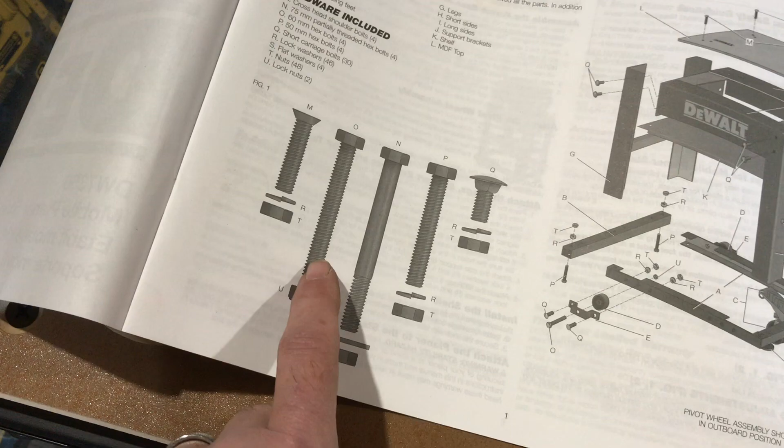Also, just one little note. Let's go through this. It's going to tell you to use these to put these casters on. Don't listen to that. Oh, I said the dirty word. Use these instead. These are spare. The bags came with both of them. Now the casters are listed both on the instructions and on the bag. All the bags actually have labels on them as well. Use these. These are not listed as that.

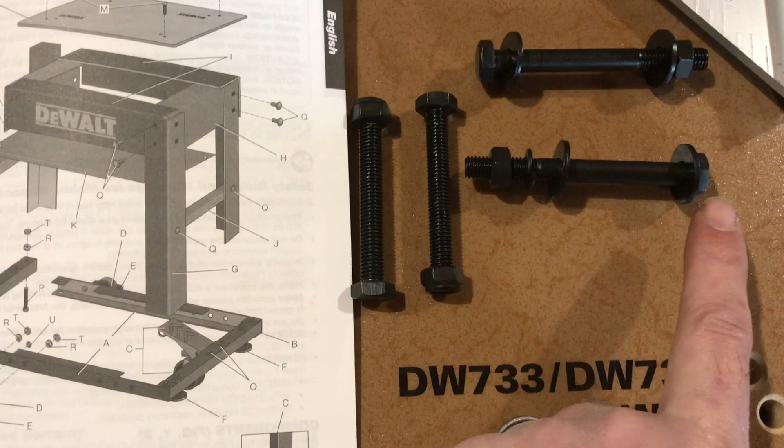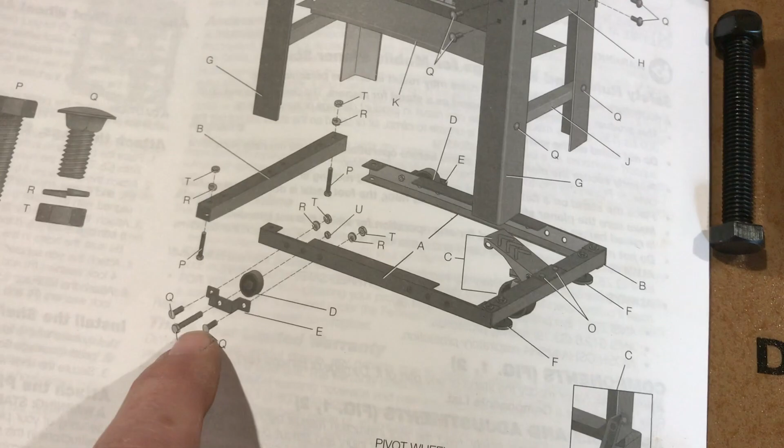So use this bolt with the non-threaded shank and the washers for the rear casters. Also, on the front caster, it shows to put the head of the bolt here, and then put the nut and the lock washer on the other side. Don't do that, because if you do, your leveling feet, you've got to crank them almost all the way out to do that. So my advice is to put the bolts facing up.

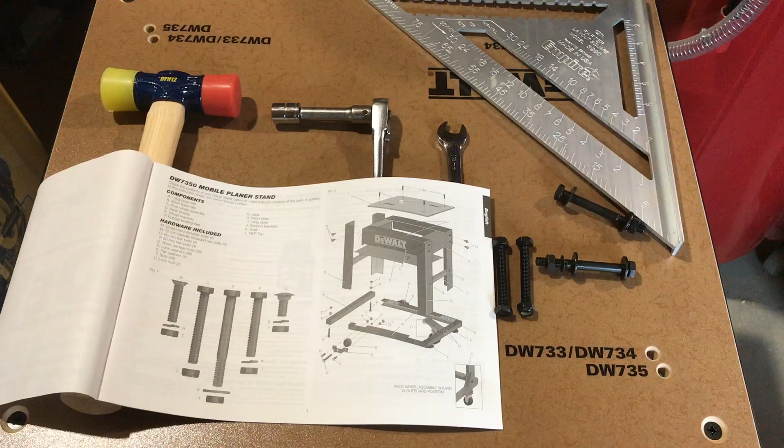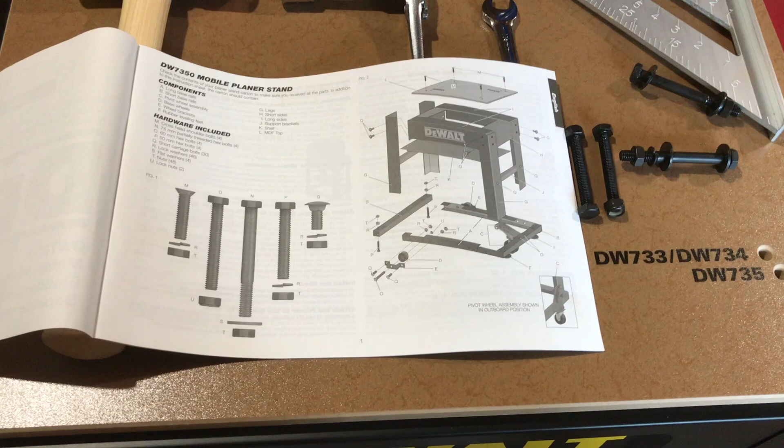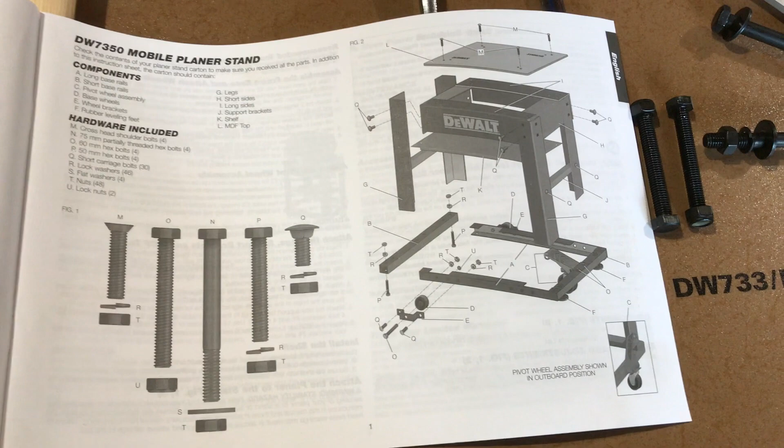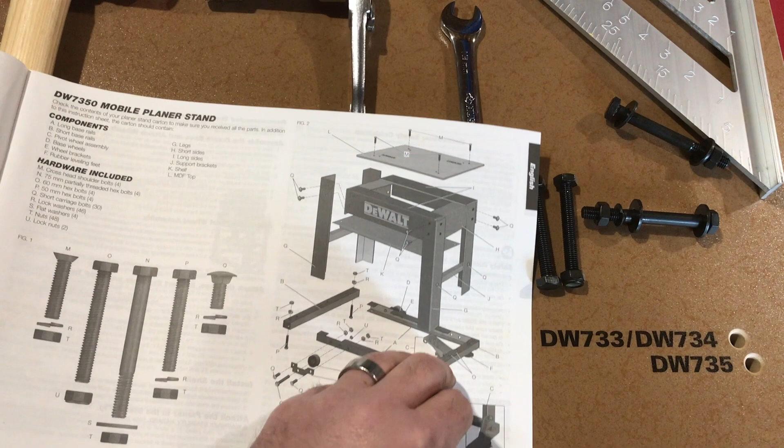If you do happen to pick up this stand, either with the planer or by itself, wherever you go, make sure that you get, I don't know, 20 or 30 - not even that many, maybe 12 or 15 - of the 1/4-inch washers. It doesn't come with enough washers. It comes with lots of lock washers, but not many washers. And without the washers, it's not as sturdy as it could be. So you're going to want to add a few washers. And I'm not saying this because I'm full of ego and smarter than the folks at DeWalt and all that. I'm just telling you from experience of building and breaking things for the last, I don't know, 40 years.

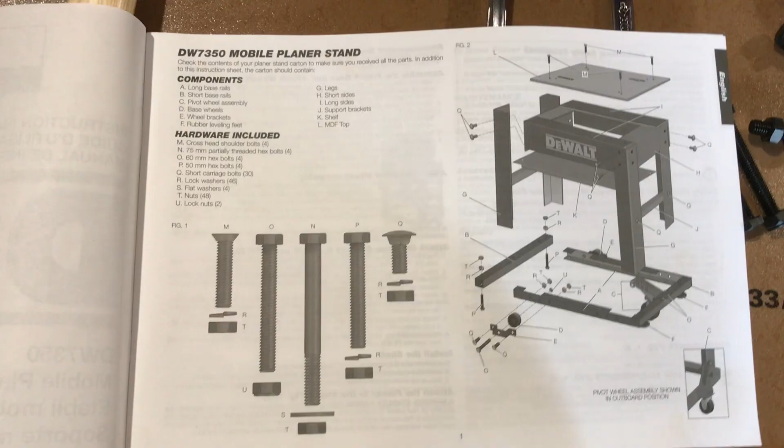That diagram and these directions, those parts are lacking. You're going to want some extra washers. And so the bolts with the non-threaded shank are actually used to attach the planer to the stand.

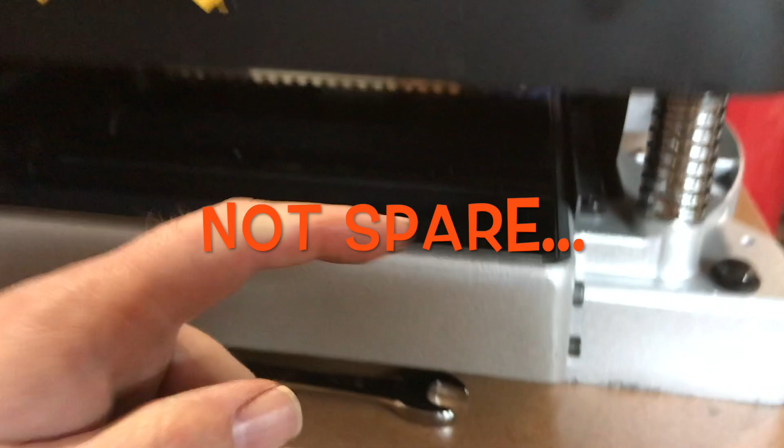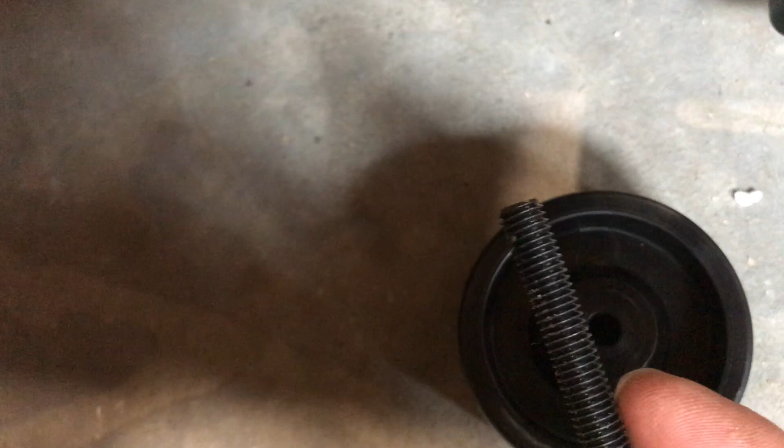And you know, I had that whole diatribe about listen to me, blah blah blah blah blah. Alright, still listen to me. There is no metal in here. It's just hard plastic, just a hard plastic wheel. And so what that means is that after a few years of rubbing on this, it's going to wear the wheel. So again, my advice is to use these for the wheel.

Now they're going to stick out. they're going to stick out a little longer there, as you can see.

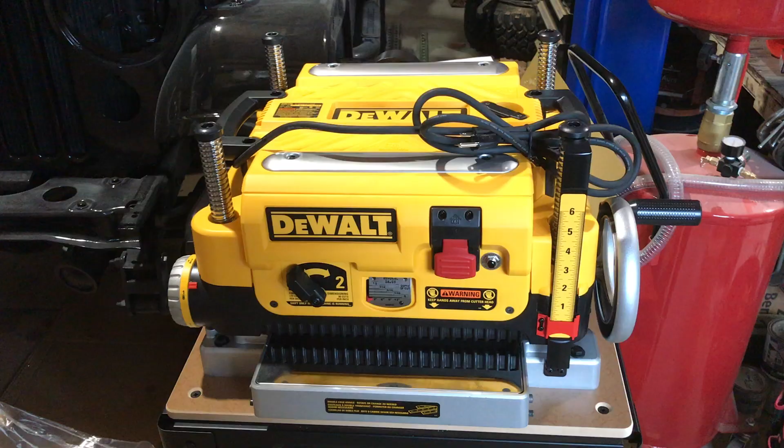Alright, so an hour and 10 minutes of total elapsed time, and the planer is on the stand. I did not put the wings on. The wings were there, just with all of the extra stuff in the shop with the remodel, I don't want them to be in the way. So I will put those on for the first plane job. So here we go.

Trouble. Oh. What? Brody! Come on. Oh.